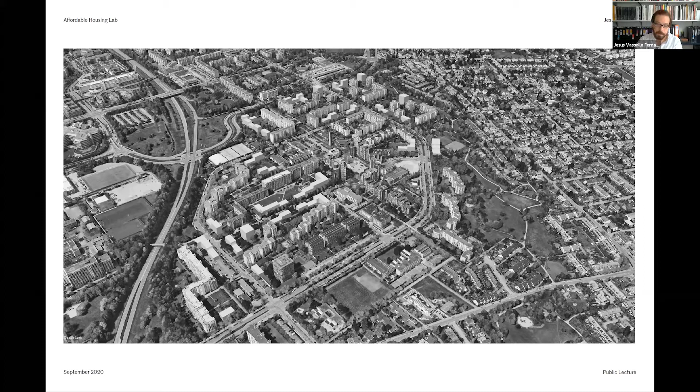The second reality that was shocking to me—and maybe this won't be so shocking to some of you in the public who are native to the US—was the actual segregation that is still imprinted in a lot of American cities.

It was surprising to me not only to see that there's still a lot of concentration of ethnicities, or segregation however you want to call it, but also that it mapped to income in such a one-to-one way.

A little anecdote: when I first moved to Houston, my wife and I were looking for an apartment. We typed in the rent we thought we could afford, jotted down a series of addresses, and jumped in the car to go visit.

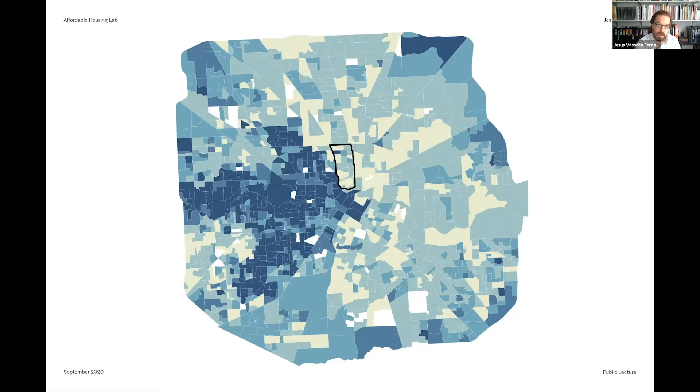This was for me very inspiring, not only because these are very beautiful buildings and they're very attuned to the realities of affordable housing construction in Houston right now, but also because of how intelligently they inserted themselves in the reality of the community by collaborating with a local institution, with a local partner.

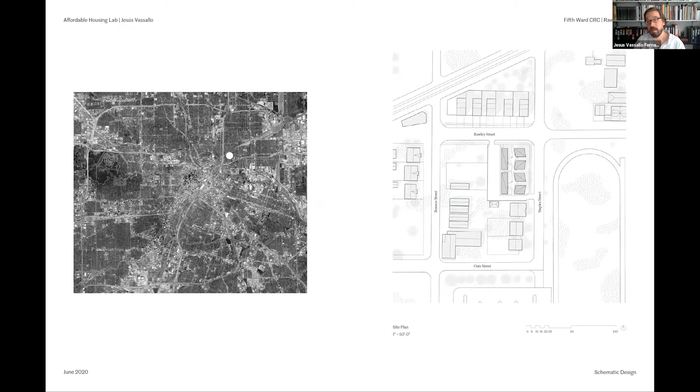Okay, so the first project is part of what's called the small rental program. This is federal money administered by the city of Houston. You can see on the left there's just a white dot indicating the location in the city. And on the right, a site plan where you can see our lot is basically 100 feet by 150, so 3 standard Houston city lots.

Following from some of the ideas that came out of the studio, what we pursued was an approach where we tried to work with a very compact footprint building so that we could treat the whole site as a single reserve of land, but then position the dwellings themselves to be as close as possible to a single family development or small lot development. We decided to go for a parti where we would have 2-story homes fronting the main road, followed by a band of pedestrian common space, shared space. Then there are 2 1-story homes that are accessible units. All of these federally funded projects have to have a percentage of accessible homes. And then there's another band at the back of the lot for parking and vehicular access.

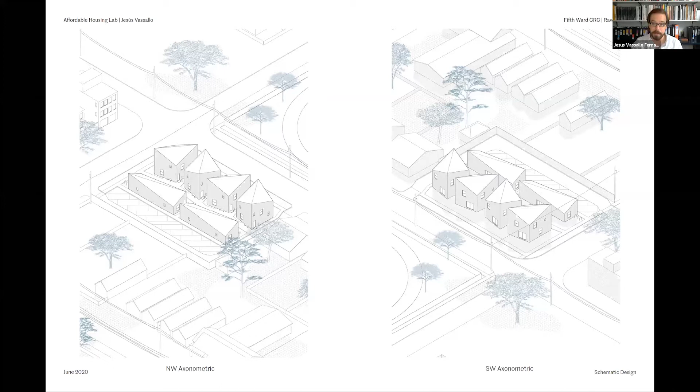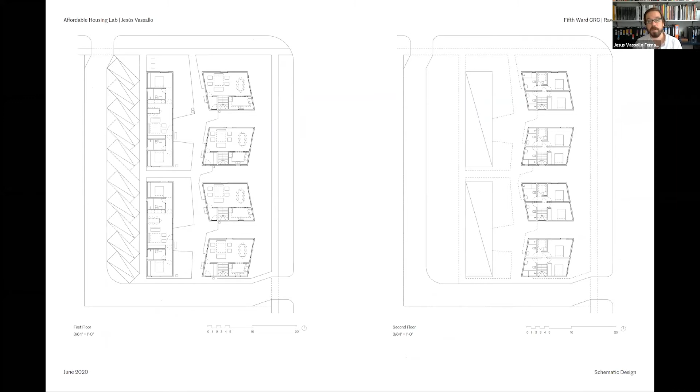Here on the left you can see the ground floor plan, and on the right, the second floor plan. You can see a bit of what I was discussing, where we were trying to keep the footprint of the buildings very compact so that we could go for this compound logic of a cluster of small buildings that make up a small community, and still leave enough open space at ground level.

As for the units themselves, the way we thought about it was to try to maximize the efficiency of the layout. So the first three projects I'm going to show are very similar in that the ground floor is for the most part open, and kitchen entries, storage, and staircases are concentrated on a denser band. That translates on the second floor into an arrangement of bedrooms where the whole effort is to avoid corridors and waste of space, giving every possible square inch to the actual rooms in the house.

So these are not micro homes; these are respectable size homes. They would abide by market standards, but that takes an effort in just being super efficient with the layout.

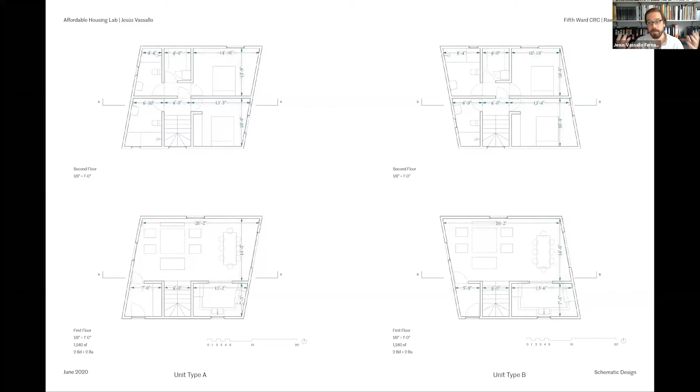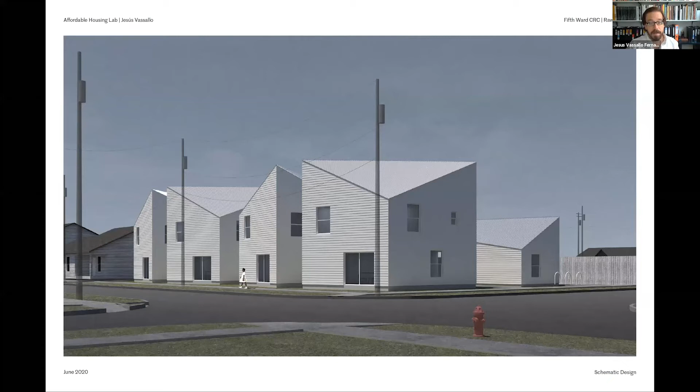And then some images. This will be the project from across the road, fronting the main street. Similar view, but this time looking north instead of south. And the pedestrian space between the units.

And then some details, just looking at the buildings themselves, where we were trying to work with the vernacular of basically clapboard cladding and metal roofs, white paint, plastic windows, and just having small tweaks to the shape of the building and the arrangement be what gives some architectural identity and some playfulness.

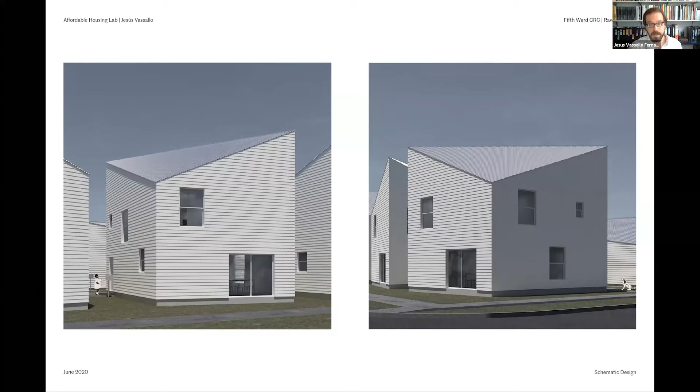And in this case, all we did was basically rotate the ridge beam about 45 degrees to get this sort of playful or abstract profile.

Second project is an application for the same program, so basically the same scope of work. It's a different site, slightly different — a little bit farther out in the Fifth Ward, as you can see on the right, in an area that starts to get close to the highway with bigger, empty pieces of land. This is a whole city block owned by the Fifth Ward, where they have an office building they want to turn into a social condenser for the neighborhood. They're working on it — it's like the non-profit equivalent of a co-working space for the neighborhood.

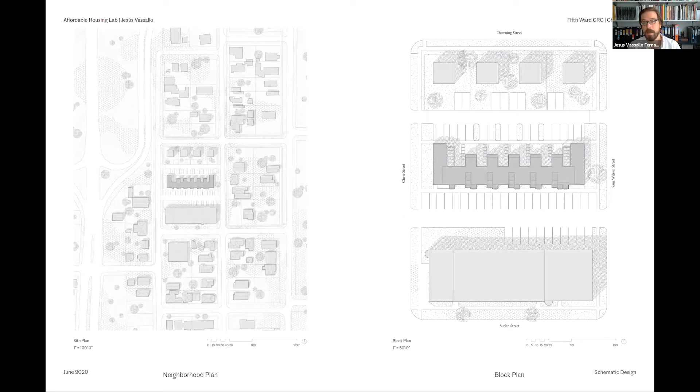And then they asked us to produce a master plan for rental housing and housing for sale. So what I'm going to show you today is the rental component, which is highlighted in a darker gray in the center of the plan.

In the end, we went for a solution based on terraced housing, similar to — we like to compare it to — the terrace housing for workers in Philadelphia or some parts of London. It's again super compact in plan, very efficient in giving the maximum amount and quality of space, but without many gestures.

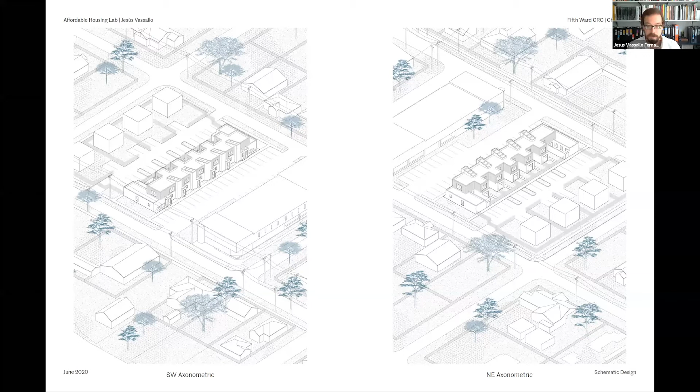And the layouts, I think, are already quite similar to what I explained before. These are different in the sense that they have party walls on both sides, but also there's an outside porch at the ground floor that supports a third bedroom at the second floor, which becomes the master bedroom.

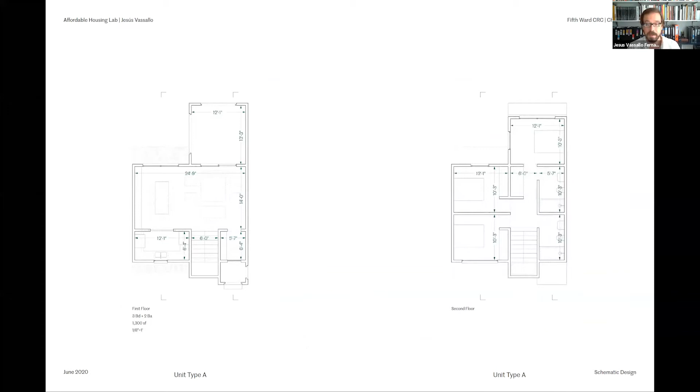And then the accessible units, again, are one-story. They're a little bit more inward looking, perhaps — like small patio homes — and they benefit from double height space in the living room and kitchen areas, because we basically match the height of the two-story homes to give them that extra cubic footage.

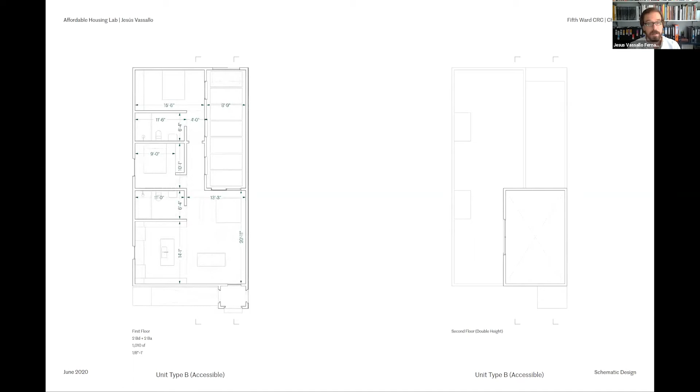So maybe in this drawing, where we can see the plan of the whole block, it's a little bit easier to understand — we have five two-story homes in the center, and this row is capped by two accessible one-story homes at the ends that help shape and give some limits to the back courtyards.

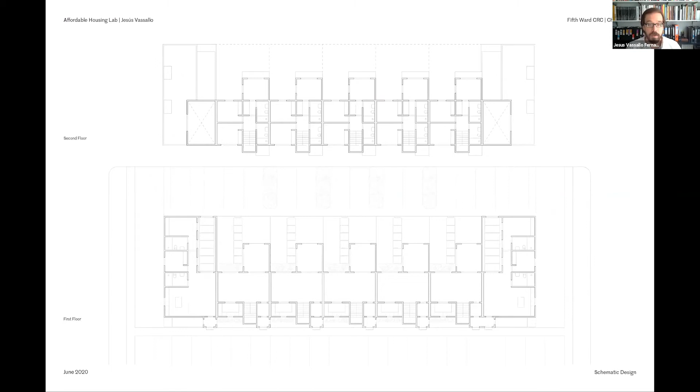So here you can see some images. This is the more urban elevation I was referring to, facing the bigger building, where each entrance is individuated with this volume, as well as each staircase.

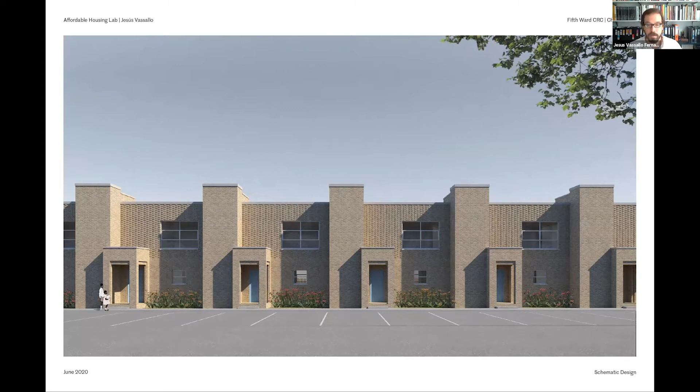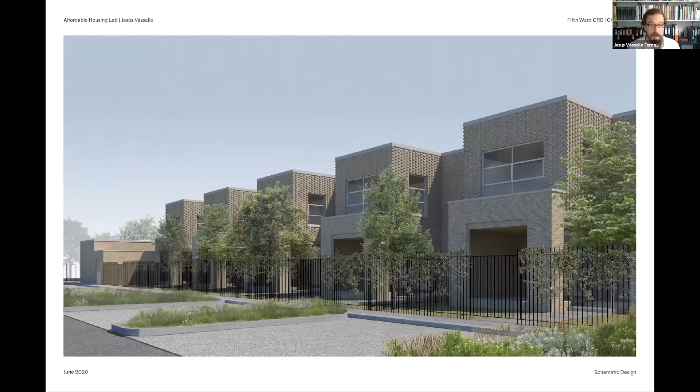So we were trying to basically, within the unity of the whole, distinguish the singularity of each of the dwellings. As you turn around the corner, very simple side elevation, and towards the back, the dwellings open towards their own yards with a series of porches, etc. Zooming in a bit more on this relationship of the dwelling to its own garden through the porch.

So these two projects, we turned them in late June, if I remember correctly. The city of Houston is meant to announce the winners of that competitive process in the next two weeks, so we will know then if they've been awarded and move forward or not.

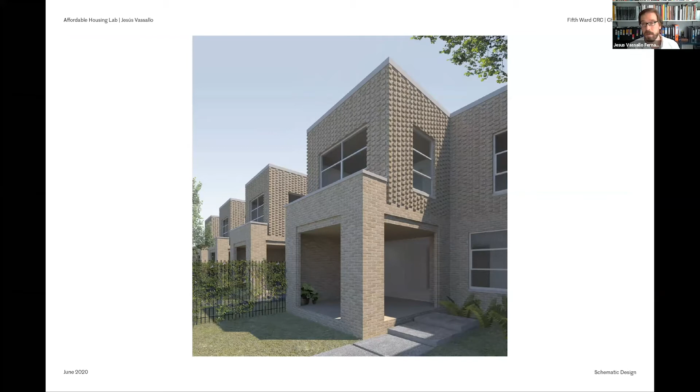The third project is based on the same architectural premises, but it's a project we did for a different funding mechanism. This was part of the affordable housing programs of Harris County, which means it's outside the city of Houston boundaries but inside Harris County. This is on the Crosby-Lynchburg Road.

On the right, it's a big lot. On the left, it has a little frontage to one of the main roads in the area, and it's limited on the right by a small bayou or tributary. This is almost a rural setting—it's a mix where some parts feel really rural, some feel more exurban. One nice thing was that it's adjacent to a bayou, and only the front of the site had been developed, which meant there was quite a bit of trees and natural forest occurring.

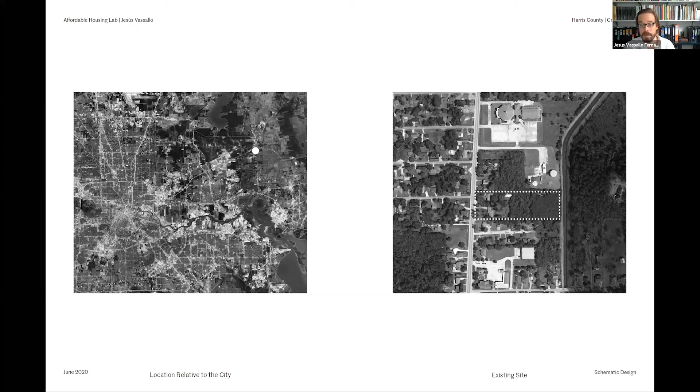So we decided to work with that landscape and leverage it as much as possible. The concept is similar to the first project I showed, with clusters of two-story homes. Each cluster congregates around a common yard, spaced out by one-story accessible units. There was also a requirement for a large detention pond, so we placed that closest to the bayou, working with the landscape to produce a logic of layers: a landscape of swales along the road, then the landscape of front yards, then the landscape of the pre-existing forest enveloping the houses themselves.

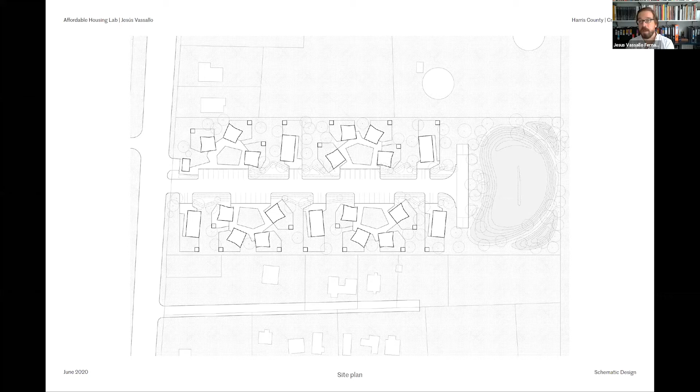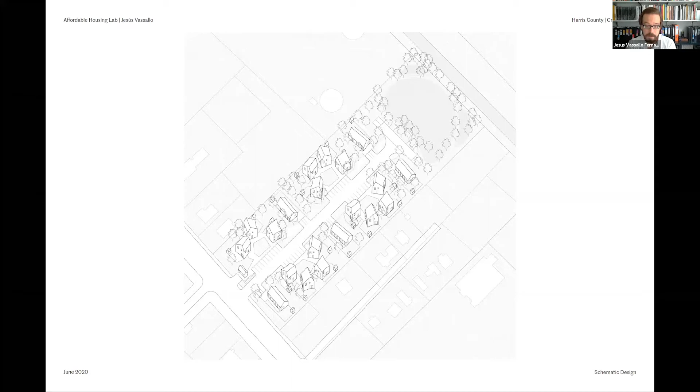Maybe it's a little easier to understand in this small axonometric. The houses themselves are similar—these are slightly larger, three-bedroom homes, but the logic of the layout is the same: open living below with very compact services, and moving up you have two to three bedrooms in this case, and two full baths.

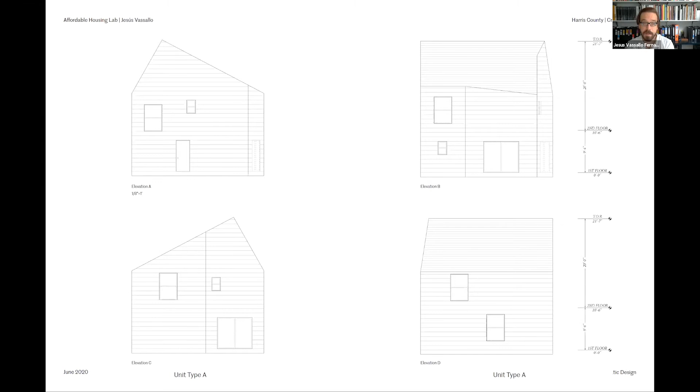Again, working with vernacular typologies and construction materials, trying to produce playful and interesting, simple designs.

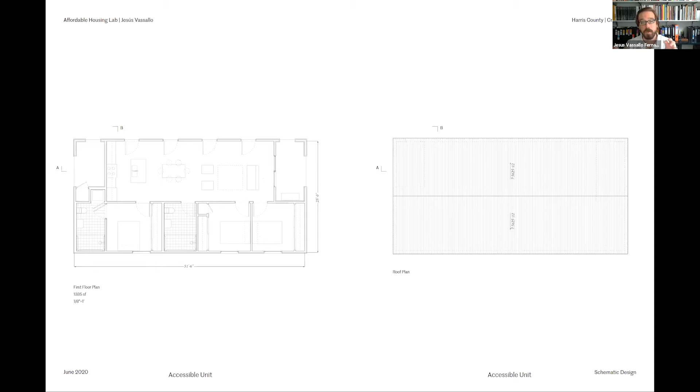Here's a section through the building, and then the one-story accessible units that are very reduced and archetypical. In this case, it's a big-room type approach where shared living, kitchen, and dining all open directly to this space. There's a side porch that gives direct access from any point in the dwelling, and then two smaller, more private porches both in the front and the back.

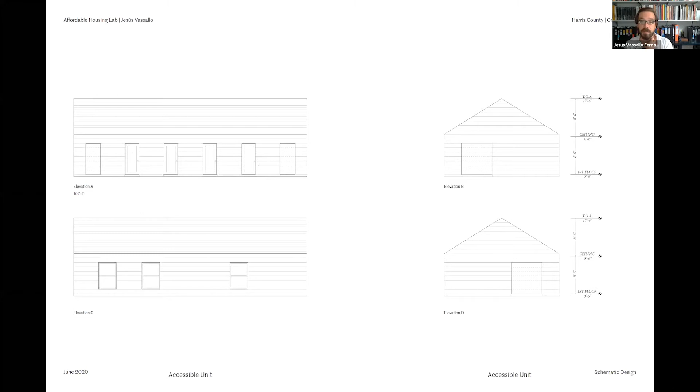Again, very simple elevations. What we were doing is playing with the scale of the cladding and the scale of the windows to give some personality to these buildings. In all of these projects the windows are oversized, and we're also working with the scale of the cladding to try and give these small buildings a sort of presence.

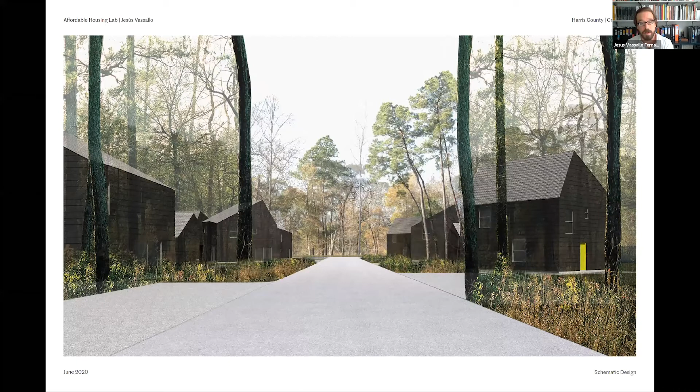Again, very simple sections, and an image through the road and around it, showing these clusters of homes with the detention pond and the bayou beyond. This image shows quite well the logic of layers we were working with between the architecture and the landscaping.

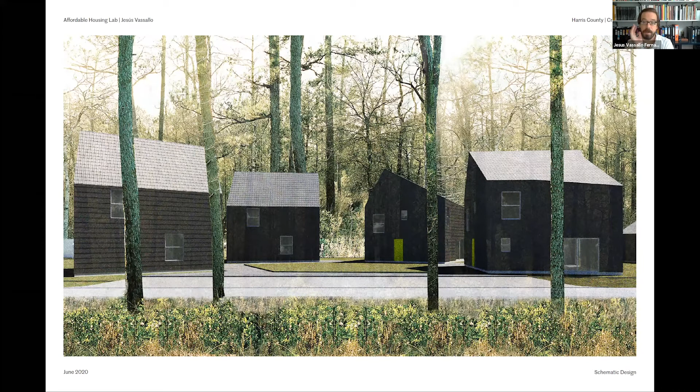You can see one of these shared yards, with four homes sharing this front yard that gives access to each of them, and each house opens towards the forest in different directions for more privacy. There's a common yard area, and the back of the houses opens up with bigger openings towards their own more private yards.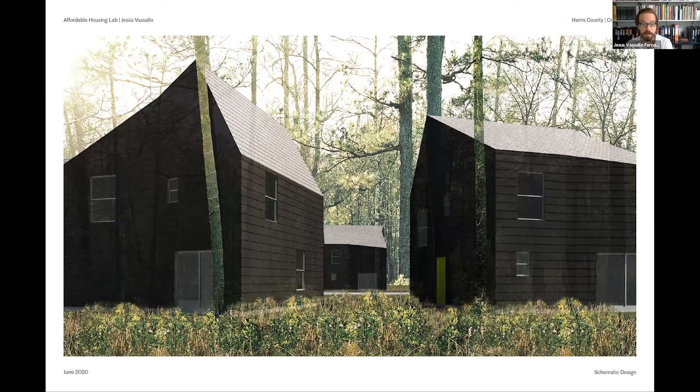Okay, so that's the first 3 projects. Now I'm going to show just 2 more, and they are a little bit different in that they are not just affordable housing, but they also touch on arts, since they are artist housing projects.

The first one is the Deluxe Cottages, which we did with the same partner, Fifth Ward CRC. We're working on it as we speak. This is off Lyons Avenue, the main artery of the neighborhood, and it's actually behind the DeLuxe Theater, the cultural epicenter of this neighborhood. It's a historical theater that was bought and refurbished by the Fifth Ward CRC, and it's now the center of their arts and cultural programming for the whole neighborhood.

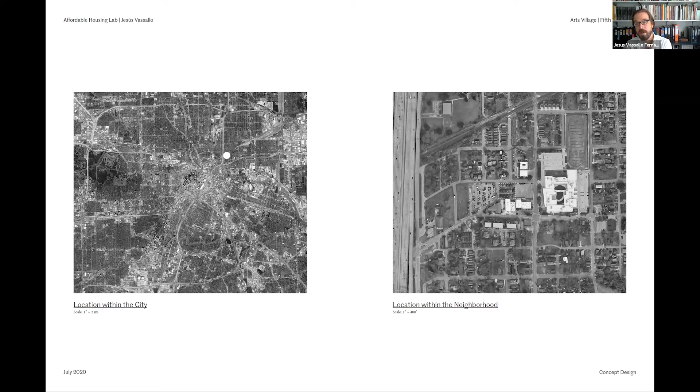They also own a pack of 15 cottages adjacent to the theater to the north. I don't know if you can see my cursor, but this is the Deluxe Theater, and this property here is also owned by the CRC—15 cottages. The cottage is basically the square equivalent of the shotgun house. It's a similar typology from the same time frame, but instead of being elongated with a single row of rooms, this is squarish and has two rows of rooms that communicate with one another.

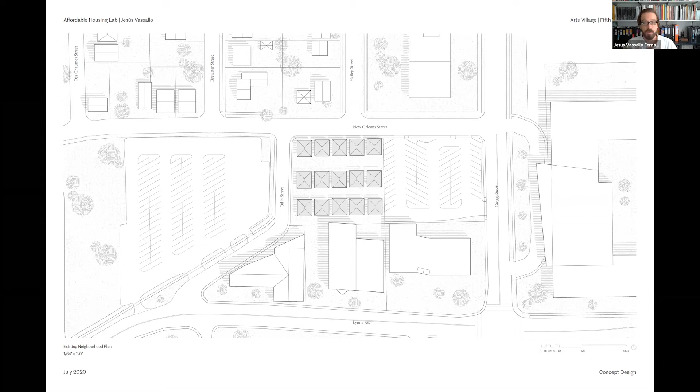This is the current layout. Basically, the way we approached the project was to ask what are the smallest interventions we can do here to add value to what's already in place and improve how it connects to the elements around it. It's surrounded by a big parking lot belonging to the theater on the right, another big parking lot to the left belonging to a church, some single-family housing to the north, and the back of the theater with its loading docks and a small courtyard to the east.

So what we proposed was very simple. The biggest move we made was to remove one of the cottages toward Odin Street to make room for a public plaza that gives more of a public front and entry to the project, but also provides space for outdoor performance. Then we turned the building immediately adjacent to the plaza into a more public building, adding a side porch to reorient it toward the square, and retrofitted it as a sort of bodega or public house for the whole development. We also introduced a network of sidewalks, pedestrian connections, and planting to give orientation and improve how the parking, cottages, and theater relate to one another through this new courtyard space.

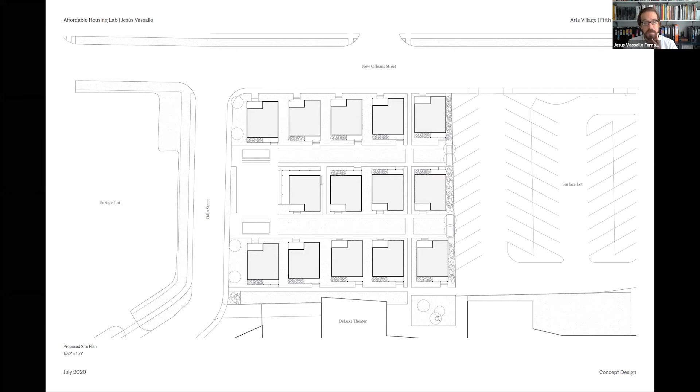Similarly, in axonometric, here are the existing cottages and then our proposal for this small master plan, if you can call it that. The idea is that out of these 15 cottages, one becomes the public building for all of them to do programming, sell their work, and hold events. The other 14 are artist live-work spaces. Out of these, 2 will actually be a residency program, so 2 artists will get to live in 2 of these buildings for free for a year, and in exchange they'll be expected to produce public art programming for the neighborhood. The remainder will be controlled rent for local artists in the community.

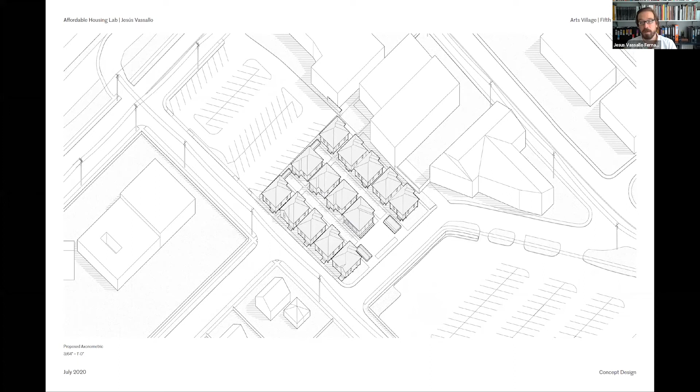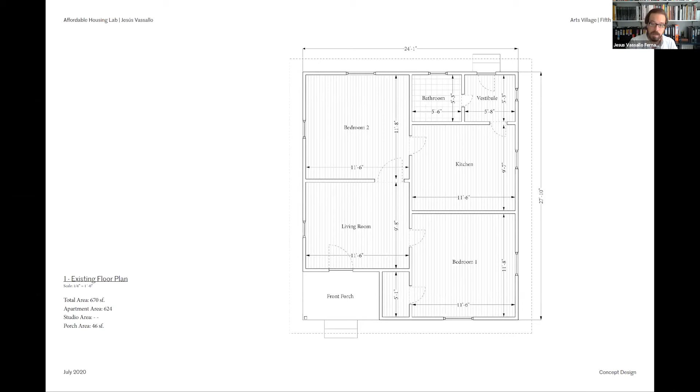Moving into the buildings themselves, this is the original layout of the cottages. I find this type of historical layout very interesting and appealing. However, when we engaged the artists in the neighborhood through our input meetings and outreach efforts, we realized it wouldn't work so well for a live-work arrangement, because it's difficult to navigate this type of layout without constantly moving between the living and working parts of the dwelling. So in the end we developed a series of layouts, and the community preferred the ones with a clearer distinction between life and work.

This was something interesting that came out in our conversation with artists—they said it would be really great if you could access the bathroom both from the workshop and the dwelling, because when a curator or colleague comes, they just come to see your work but might need to use the bathroom. That way you don't need to let them into your house and through the more intimate parts of the dwelling.

So we came up with this idea of a Jack and Jill type of bathroom that also serves as a connection between the two spaces.

The other layout we prepared is similar. We just pushed this service core towards the north, which instead of a one-bedroom layout for the dwelling, gives you a studio layout. It also changes so that the room connecting to the new back porch is now the kitchen. It makes a bit more sense from the standpoint of circulation and privacy, but otherwise similar.

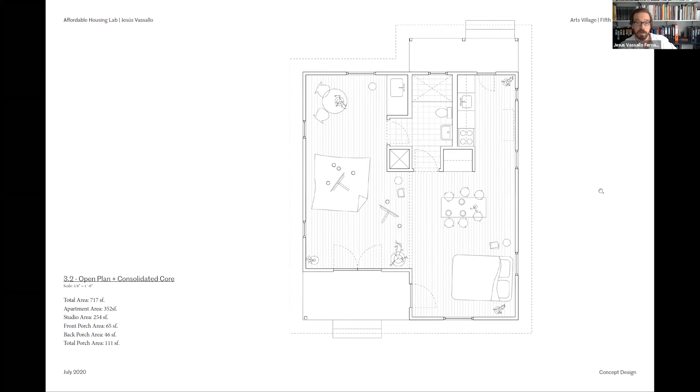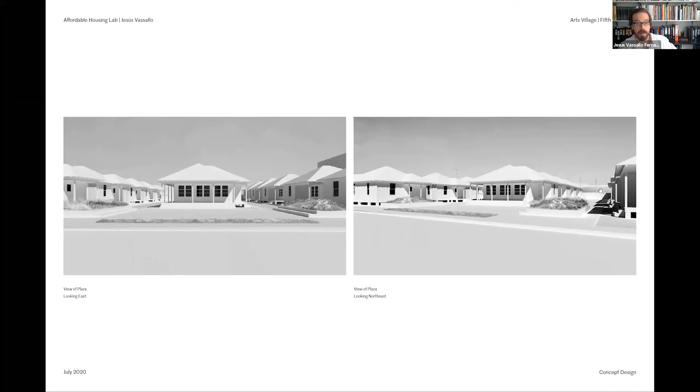Just some images here of this new square for public performance and gathering, and how we reoriented the public building with a new porch. Some views from the plaza looking into the project, and then across the plaza looking northeast.

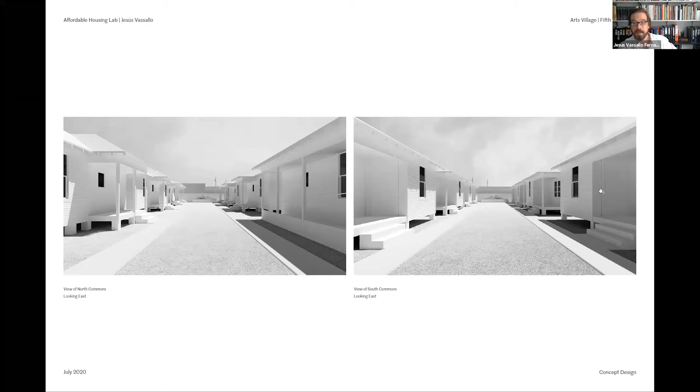These commons, what we call the commons, are these long shared spaces in the north and south part of the site.

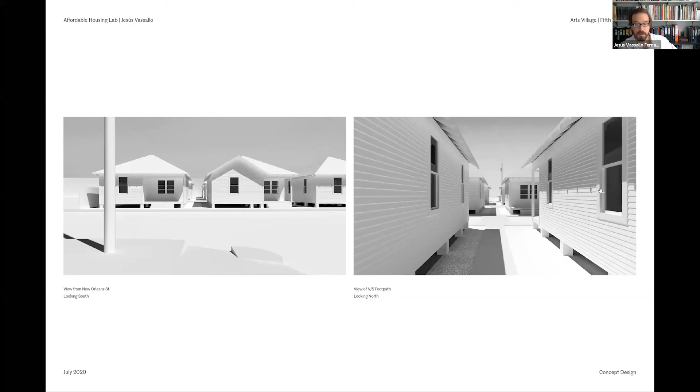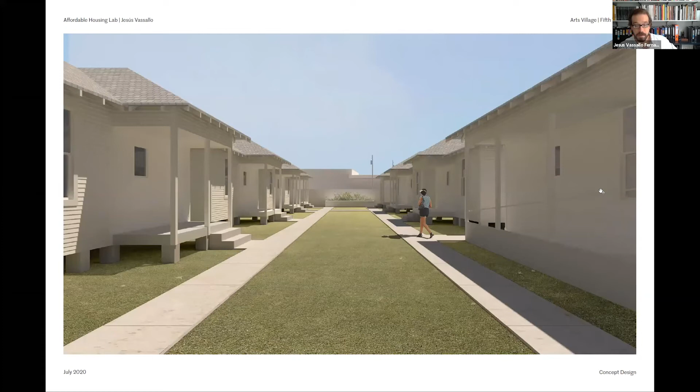The spaces between the cottages and the theater itself, and then the spaces between the cottages themselves as they are today, but also as they are modified by our intervention. And then some bigger color images to get more into the actual spatial qualities of these spaces.

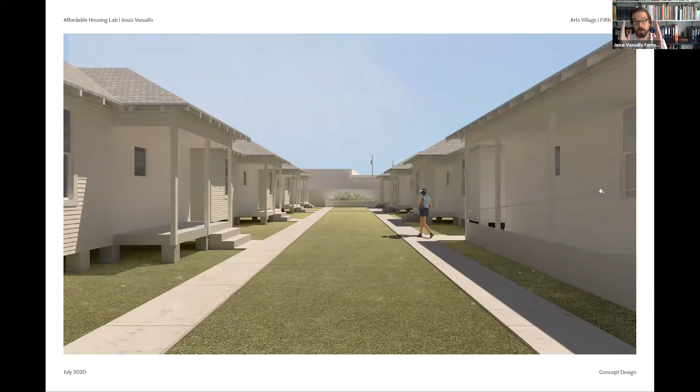Something important here was that we used the addition of the back porches as a way to correct the proportion of these spaces to make them more equivalent, because the way the existing units are oriented, there was a bias where some spaces were much better than others. We were able to mitigate that by lining the existing dwellings with an additional porch in the back.

Okay, and then the last project is one we're developing with Project Row Houses.

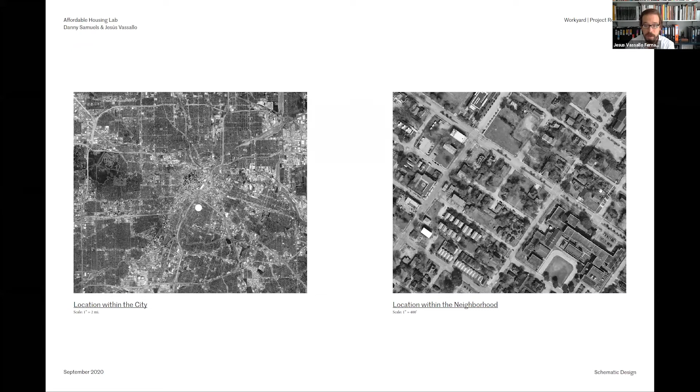In the process of working with Danny, when he saw the work we were doing for this cottages project, he brought to our attention that some years ago they built a work yard at Project Row Houses—an open air workspace for the Rice Building Workshop to work on these projects. Since it's no longer in use, he wanted to propose converting it to artist housing. So we quickly got to work together, and we're still in a very early process, but I wanted to share it today.

Here in the dark gray, you can see the work yard and its location within the campus of Project Row Houses. These are the original row houses and the institutional building in the corner, and these are the duplexes, and this is the single mothers' building, etc.

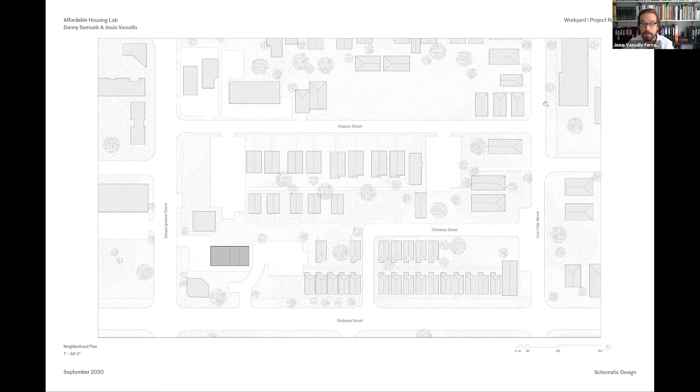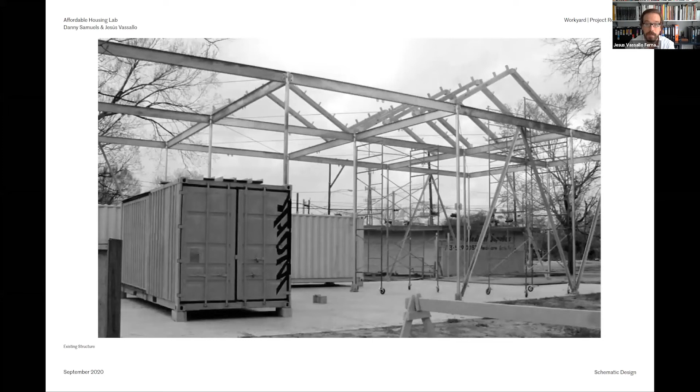So an image of the work yard under construction—it's a very light, beautiful, lightweight metal construction. It has four bays, so it seemed logical to say, okay, we're just going to partially enclose the structure to produce four dwellings, basically one per bay.

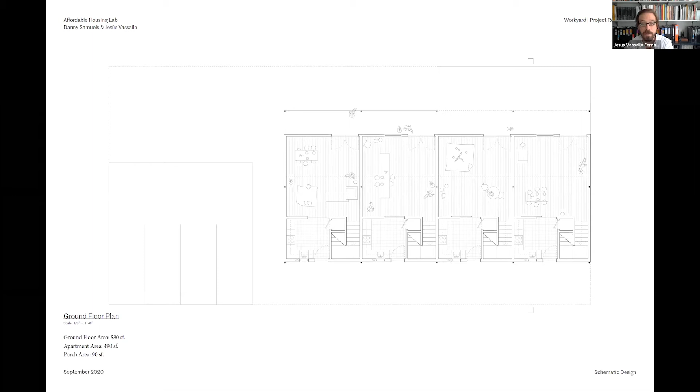Then again, we're packing the serving spaces, the kitchen and the staircase, the boiler, etc. in the southernmost band, and then moving up the stair, there's a mezzanine level that has a bedroom, a walk-in closet, and bathroom.

Perhaps it's easier to understand with the section, where you can see how we're using clerestory windows to take advantage of the double height space, and to have everything be more or less continuous, with the kitchen and the closet being the only parts that are more enclosed for practical reasons.

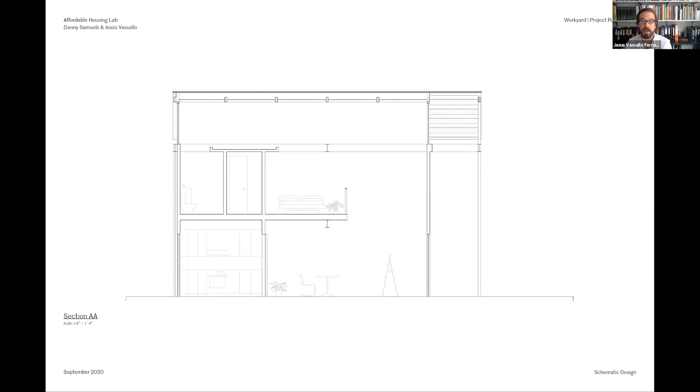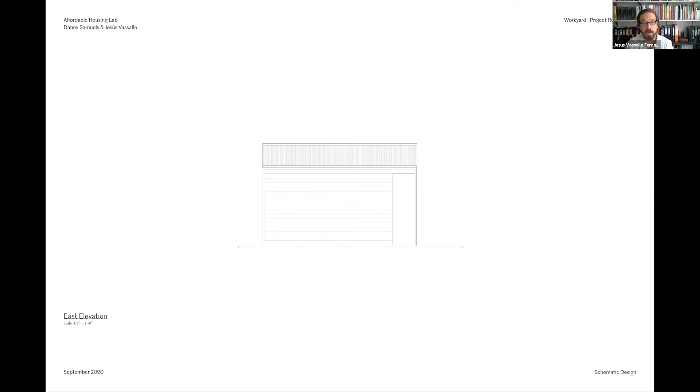We tried to work with a simple logic for the elevations, where we would add to the existing layers of the building with our own small variations. This is the north elevation with the deeper porch, then the side elevation that is more blank, and then the south elevation with the access to the kitchens, etc.

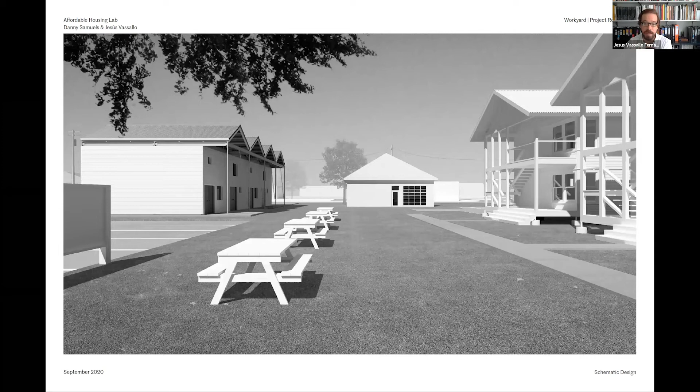So some images, and I really like this image, it brings us full circle to the beginning of the presentation, where I really feel it's so special for me to be able to try and contribute our own small contribution to these very, very special projects.

You see the duplexes on the right, and then the reimagined Workyard with the live-work units for artists on the left.

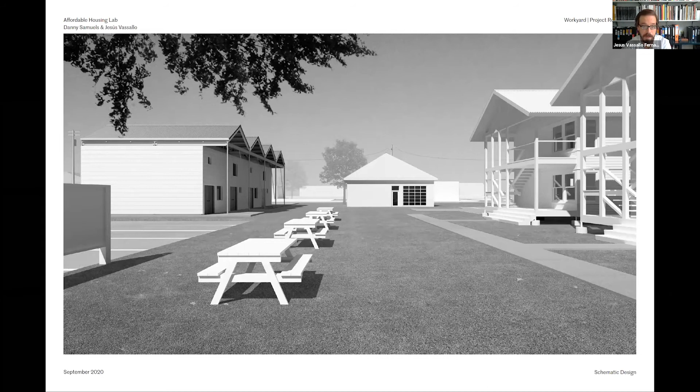And then again the north facade with the porch, to get a sense of how it sits within the master plan for Project Row Houses.

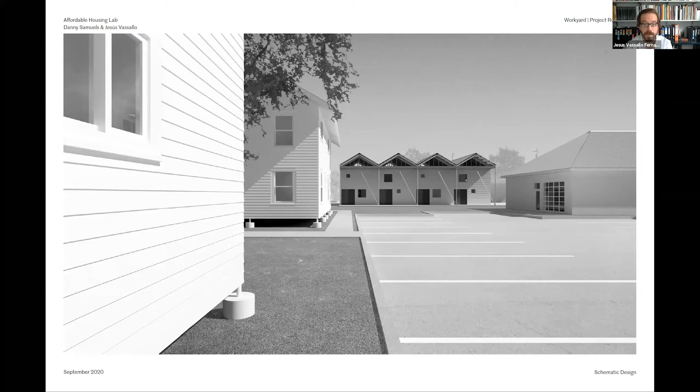So those are the projects we've done, those 5 projects between March and August, which I think is a very good crop of projects. We're very happy with the results.

What are the next steps for us? I think the one ambition that we have is that we want to engage our colleagues at the Kinder Institute more, and to be more adventurous and experimental in the research phases for each of these projects. I think we've been very inventive with the design, and we've been very privileged to work with sociologists, both in facilitating community outreach, but also in looking at data, etc.

But I think there's more we can do if we work together more intensely. So that's one ambition. The second ambition is to scale up to multifamily. There was an emphasis on smaller scale that came out of the studio we taught in 2019, but we're already engaging in more medium scales and larger scales. We have two projects starting right now that are already much larger.

And then also an emphasis on public space and social infrastructure. This is something I have always believed myself, but it's being proven in practice, that you cannot really separate the work on housing from issues of public space and social infrastructure. Those two have to go together, because if you don't contribute a bit of quality public space and social infrastructure with each housing project, you cannot expect the city to come back and produce it for you afterwards, completely disengaged from the housing component.